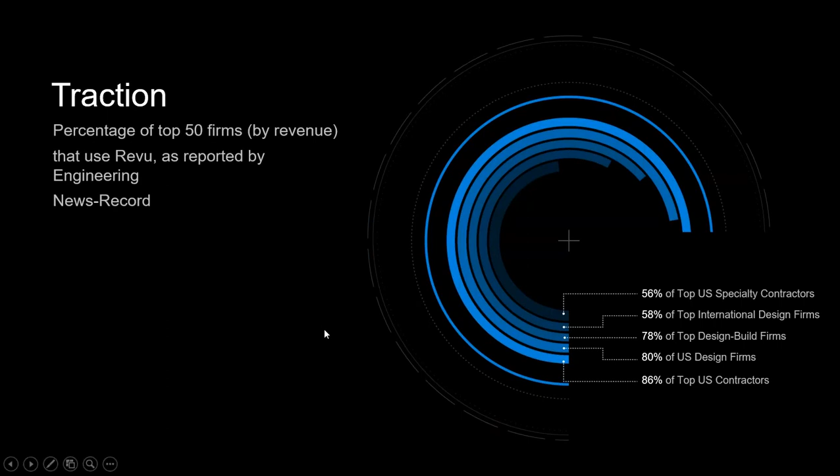And that's what we're going to highlight today, a few of those particular aspects that are new to 2016 and very useful throughout this technical world. So as I mentioned, we're going to go through a foundational explanation of what Bluebeam Revu is and what it can do, broken down into 5 parts. We'll start with the interface, then move into the markups, placing information on the page. The tool chest, which is reusing that information later on, not only with yourself but the rest of your team. And then we'll get into the markups list, which is harnessing the data that you're placing on the page.

You may not even be aware that you're doing so, but there's a lot of metadata behind all the markups that you're placing on the page—authors, dates, and times—and really harnessing that and applying it to workflow can be very, very useful. We'll show a highlight of how to do that.

And then finally, we'll touch on Bluebeam Studio. That is the cloud collaboration platform built into every seat of Revu, and what it's capable of doing—not only hosting your documents, but allowing you to collaborate with your team in a live environment.

So again, this is kind of the intro. I'm going to show off the list of what's included in the newest revision of 2016, but then we're going to go ahead and demo the basics first before hopping back into it. So without further ado, here is the big reveal of the new features within 2016. Not going to go too deep into these right now, but these are some very, very valuable tools that I'm looking forward to showing off.

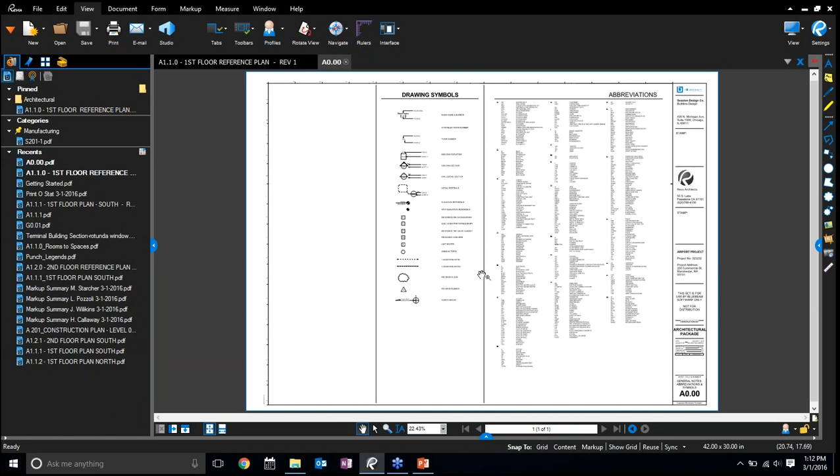Now you'll see, obviously, I don't have any other documents other than this original one, so I'm going to go ahead and open some others. Maybe I want to open this A0.00, which happens to be my schedules and abbreviations, different items that I can cross-reference against my A1.1.0.

Now, in this particular case, I may want to open an A1.2, for example, and this one has a few markups on it, and this will all open, and I can kind of cross-reference these.

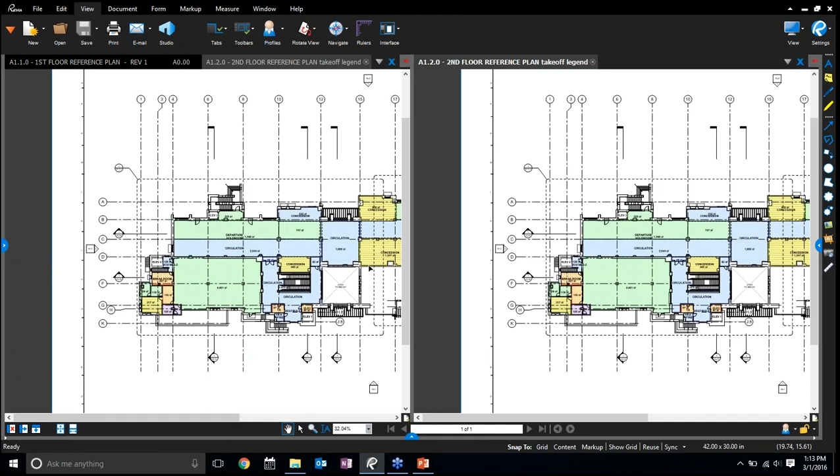But in this particular example, I may want to cross-reference my second floor plan versus my first floor plan. So to do that, I can come down here in the bottom left and select my split vertical. With this, it will basically put the same document on both halves, but with a click of a button, I can now have these documents side by side to cross-reference them.

I can zoom in and navigate each one of these individually, and you'll notice, as I go about doing so, I can try and align the column lines if I'd like, or I can come down to my sync button and be able to navigate both of these at the exact same time.

Now, as I zoom or pan, it's going to allow me to work with each one of these documents at the same time. Now, these are not actually lined up exactly on X and Y coordinates. As you'll see, they're kind of shifted a little bit, which is totally fine.

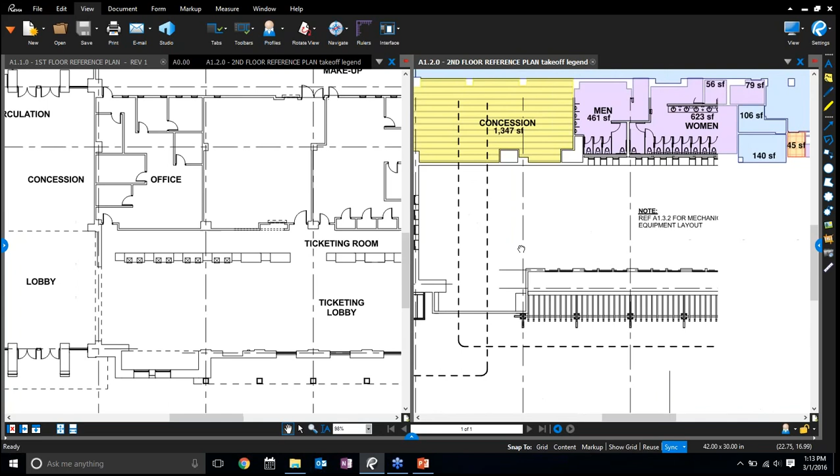But if I were to, for example, need to cross-reference if there's bathrooms one on top of the other, or pipe chases, to be able to confirm if there's any plumbing issues or anything like that, I could be able to do that in this case.

Now you'll see here, I have a men's and women's bathroom on the second floor above what appears to be just an open blank area, and so there may need to be some extra consideration for where I need to run these pipes to and from that particular bathroom. Just one particular example, but again, it allows me to work with multiple documents at the same time.

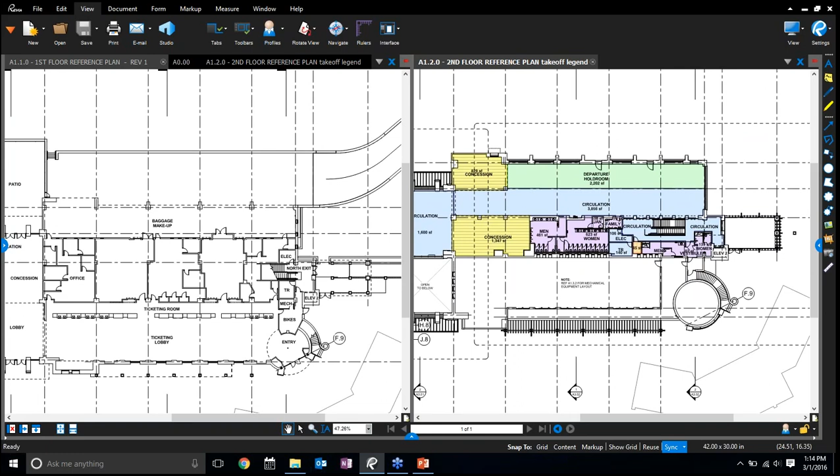Now, I could split my screen up to 16 times if I'd like, but I'm going to go ahead and unsplit and clean this up and work with one document at a time in this case.

So the next thing I want to go ahead and highlight is the ability, of course, to mark this document up.

So in this case, I'm going to come up to my markup option, and then over to all these icons that you're seeing here. Now, if you remember, these were all grayed out originally, and that was due to the fact that I didn't have a document open. Also, if I have a locked document, both in read-only mode, or it's got some security on it, for example, these would again be grayed out because you're not able to mark up a locked document. But in this case, it's unlocked, so let's go ahead and start working with it.

So, for example, I'm just going to go ahead and place a text box, and it works just like any other text box. And I'm just going to go ahead and place that information. Now, as I place that particular text box, you'll notice that I don't know what door I'm talking about. No one else does either.

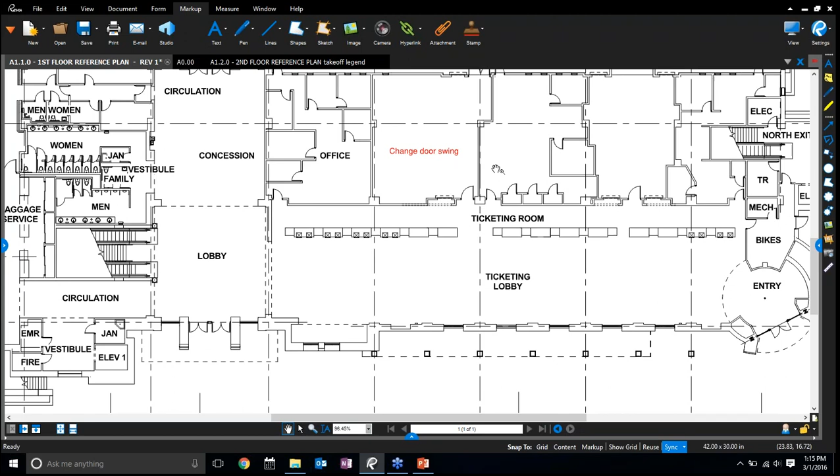So what I'm going to go ahead and do is actually place an arrow. So place an arrow, text box, voila, I know exactly what door I'm talking about. But that was kind of a bit of a process.

So instead, from now on, I'm going to start using my callout. So I can go ahead and call out an area and say, move ticketing 2 foot south. So I can now move my ticketing desk 2 foot south, but I don't know what desks I'm talking about. It could be all of them. It could be a singular one. And so now I need to be able to call out a particular location within the drawing.

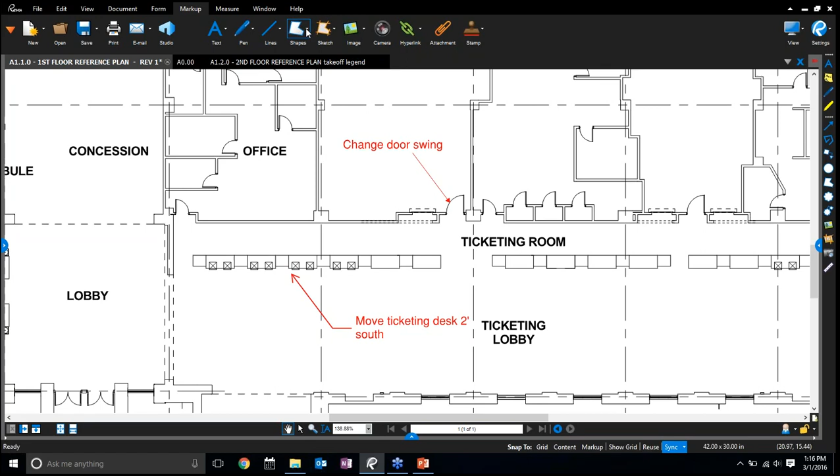Now, this is all nothing new. People have been doing this for decades with red pens and yellow highlighters trying to signify locations on the drawing. And kind of the default solution that the AEC world at least has come up with is the cloud. So from this location, I'm able to signify that I want all clouds, or I just want a particular sum, or whatever it may be. Again, this is still 2 independent markups.

So instead, what I'm going to go ahead and do is actually combine all 3 of those individual markups, the text box, the arrow, and the cloud, into one clean little markup, and place this here.

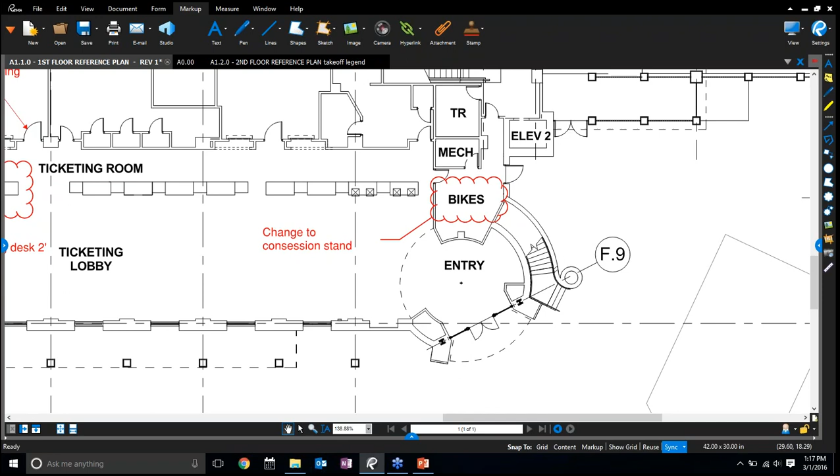So now I can go ahead and change that bike room to a concession stand because that's at the top of that particular stair, for example. That may be where I want my Starbucks to be, and that would be very easy to communicate.

Now, in this case, I may also want to be able to add visual context, for example. I may not know what concession stand I'm talking about. So I have a few options. One, I can come over to my images function, or I can right-click and come over to capture.

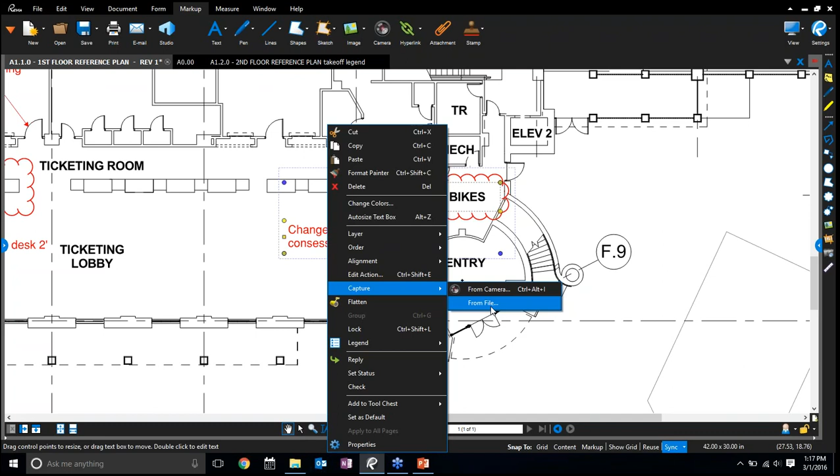From here, I can actually attach a picture from my webcam or from my computer. Now, I have some files saved on my computer, and my webcam's facing my face, and you probably all don't want to see that. So instead, I'm going to come back to my files that I have on my computer and find those images. Now, I don't have a picture of a concession stand, for example, but as I zoom through, we're just going to add a picture of a sliding door.

Now, you'll see that little camera lens there. That is basically signifying that there is a capture or a picture attached to that markup. As I click on it, it's going to basically populate or fill the screen. What's great about that is not only is it going to carry with wherever I put that markup, but it's not taking up screen real estate with an image when I don't need it.

Now, anyone with Revu would be able to access this by, again, clicking that camera lens, whether they're on the Windows desktop version or the iPad, and vice versa. So a fantastic way to be able to share contextual information, because a picture is worth 1,000 words.

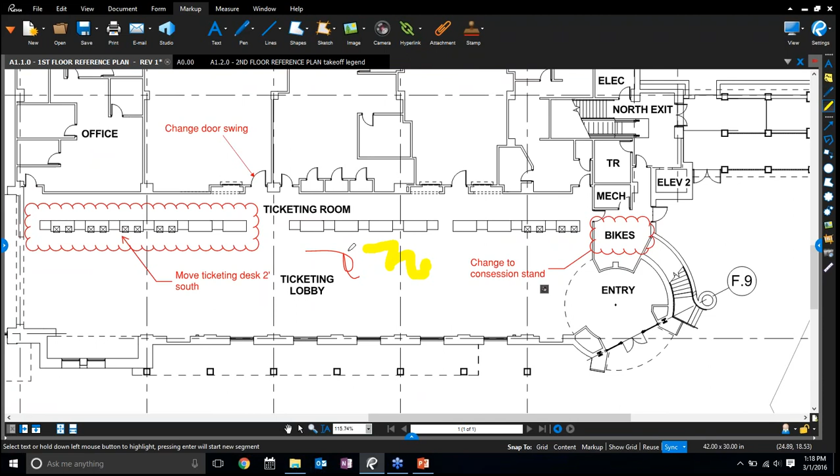All right, so now that I've placed a few markups, I do want to mention some others that we have. We have pens. If you're working with a touch interface, we have highlighters, which are fantastic. Not only can I do freeform highlighting, but it actually recognizes text as well. So it's a very useful way to be able to signify areas within the drawing. We have lines and arrows, all sorts of other things.

Dimension is a very neat tool because as I snap to content here, I can actually signify what area of the drawing that I want and ask, in this case, what is this dimension? Not a whole lot of typing or information that needs to be placed. Just 2 clicks, a little bit of text, and I can now signify that. Maybe I'm nice enough to put a cloud around it, make it obvious for my architect that I need that particular dimension.

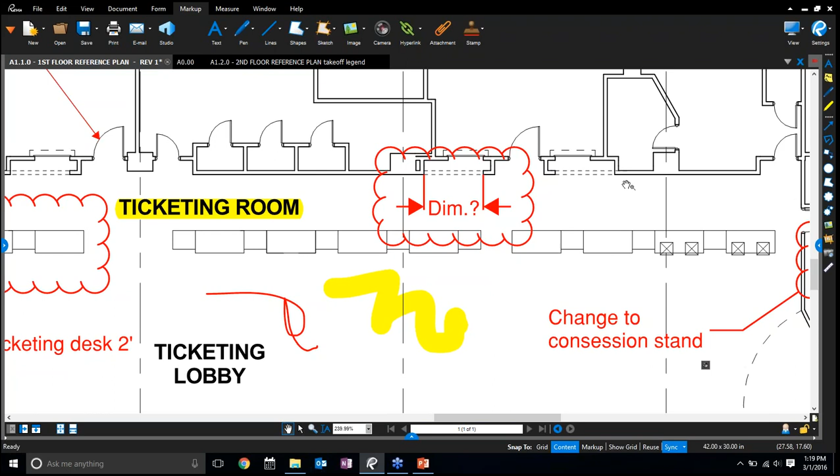Okay, so enough talking, let's go ahead and customize these guys. I'm going to customize all of them at once, and I did that just by multi-selecting. From here, I can go ahead and right-click and open the Properties panel. Now, right-click is a very powerful tool within Revu, because if you don't know what you're capable of doing, wherever your cursor is, you can always right-click and it will pop open. In this case, I'm going to go ahead and give everything a subject, maybe a subject of architectural.

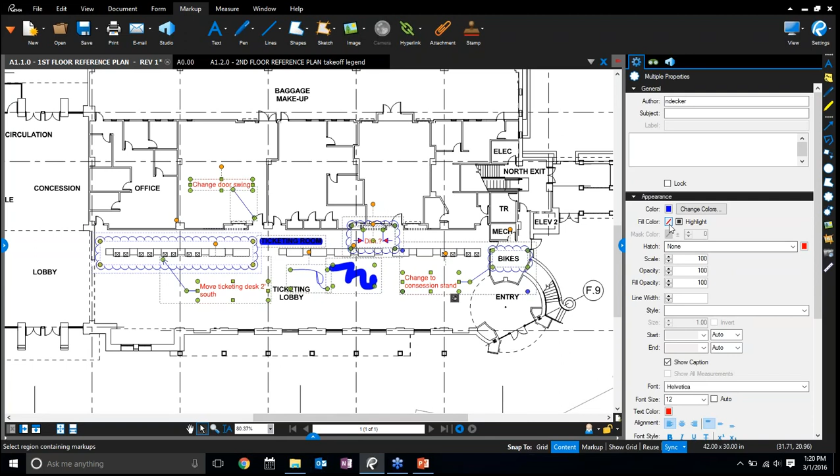And we'll go ahead and change the color schemes as well. Now, you'll notice with the subject, it's not actually going to change any of the physical properties, but it will come into play here in the markups list at the bottom, and we'll get to that in a moment. So I'm going to give everything a fill as well, kind of make it my own. Now, everything that I give a fill automatically becomes opaque. So I'm going to go ahead and change it to highlight, as you'll see, and that will allow the content and the other markups to pop through.

I can also change the fill opacity if I'd like. And as I move down the line, I can go ahead and change the text colors and maybe text size if I'd like, make it a little bit smaller, but let's bold it out a little bit, and be able to make all that customization that I'd like in this particular case.

Now, in this case, I'm going to go ahead and actually assign a custom tag. This is something that's specific to this particular drawing, and I'm going to assign myself as the responsible party in this case. Oops, go ahead and make that a cloud again. All right, so now I've gone ahead and customized all of these.

So let's start working with them. Now I could go ahead and select it, then right-click and copy, right-click and paste, and then try to resize it. But that's really kind of a difficult way to go about things. Plus, as soon as I change documents, I'm going to have to redo that exact same process, and then no one else on my team can use it.

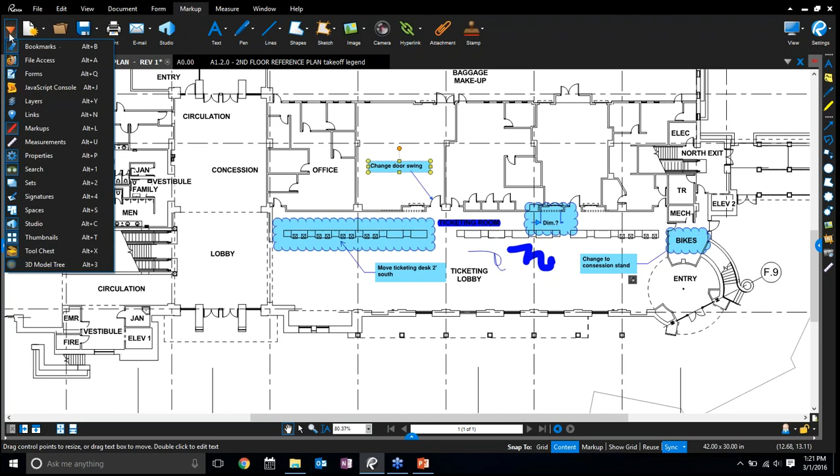So instead, what I can go ahead and do is come over to my tab, Access and Tool Chest. Within the tool chest, as you'll see, there's a number of different tool sets that are already available. I can create my own if I'd like, but you'll notice here under Recent Tools, I have a running list of what I've done so far. So if I want an exact copy of that change door swing, I can place that markup here, place an arrow wherever I'd like, and be able to signify that without really having to go back through that process.

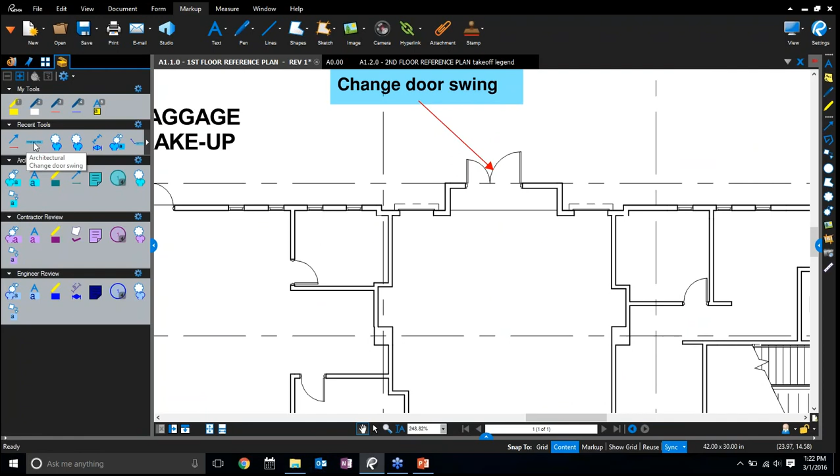Now, again, this is an exact copy of what I just did, which is just a click and drag. But if I just want to use the properties themselves, say for example this Cloud Plus is actually in properties mode. I can go ahead, signify the particular column that I need and say 'need column detail.' There, I'm able to signify that information, and it stole, or borrowed if you will, the exact same properties as the other Cloud Plus that I placed on the page. So really useful way to kind of color code all that information.

Now if I come over to properties, it's interesting—that should say architectural as opposed to Cloud Plus. But again, all of those properties that I customized should carry over.

Now you'll notice that I have a few other tool sets that I haven't touched yet. One is My Tools, which basically creates keyboard hotkeys, and then architect, contractor, and engineering. Now these are specific to the particular profile that I'm in. So if I were to change profiles, for example, we'll hop to construction, and come into the tool chest, you'll notice that they're a little bit different. They're more construction specific, in this case sequencing tools.

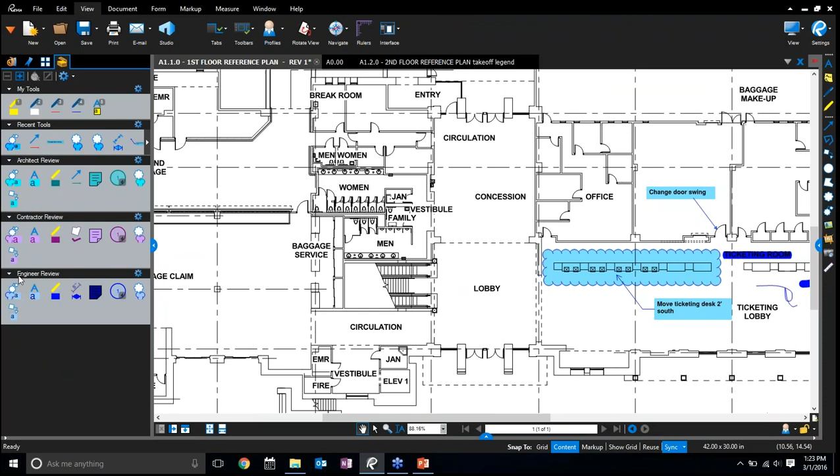But I'm going to go back to design review. It will bring me back to the view that I had as far as the tool sets and things, and I can start utilizing from here.

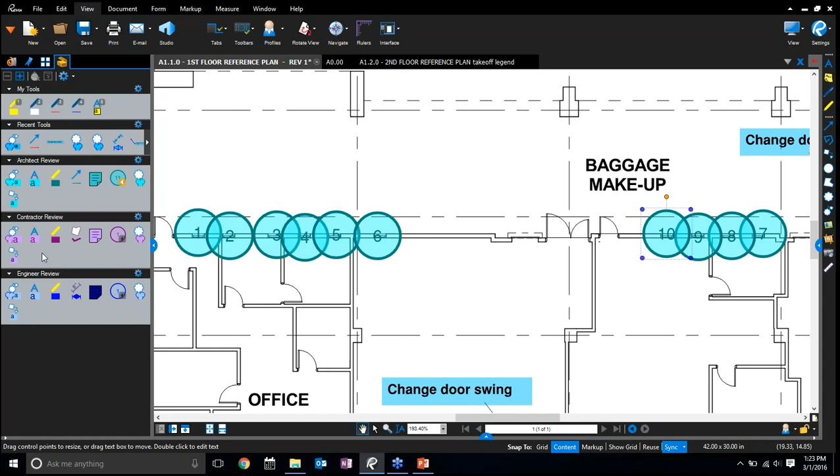Now, if I wanted to sequence, for example, the installation of windows here, I can start counting out which windows I want in which order. And then I want to skip back and start going this way. I'm now able to signify the sequence there in that particular location. Now, the architect may not do this, but the contractor very well could. They may try to signify to their field employees what order they want things constructed, and this is a very simple way to do that.

All right, so I can also create my own if I'd like. In this case, I'm not going to go into that because I want to conserve some time to show off all the other stuff, but know that it's available. We have some resources online to be able to show that.

All right, so the next aspect I'm going to show is the markups list. So as I center myself kind of over this mess of information I've placed on the page, you'll see that there's a lot of information down here at the bottom as well. So if I want to see where any one of these items are, I can go ahead and click it, and it's going to jump me to that spot of the page.

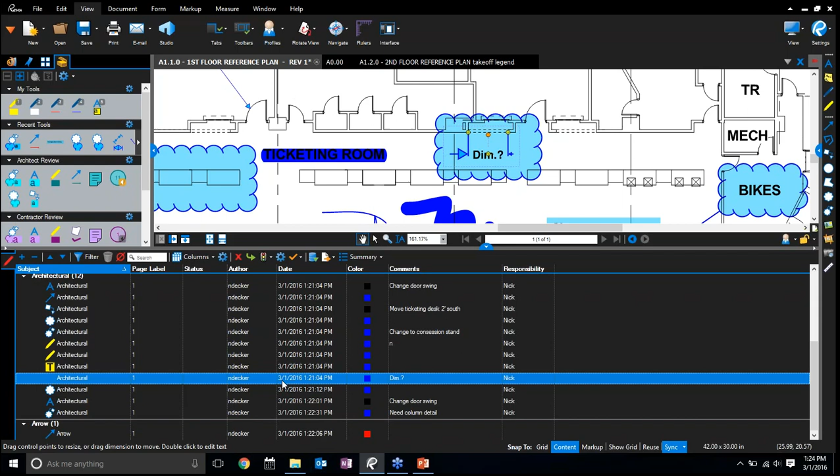In that dimension, you'll notice it's capturing not only the text that I placed, but also signifying what type of tool I had, the subject I assigned to it, and who is assigned the responsibility, as well as any date and time. I can do that with any one of these other items. If I need to find where these items are located on the page, I just click on any one of these, and it will navigate for me.

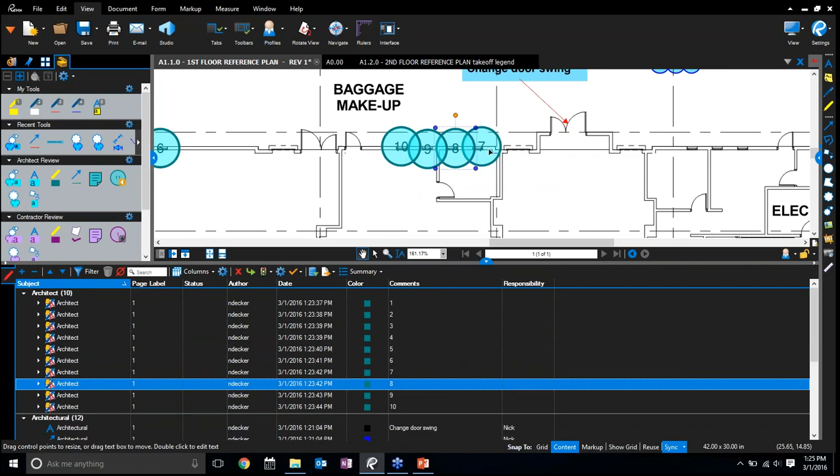Same with these sequences here. You'll notice it's capturing the text within the page and jumping and highlighting to whichever one I've selected within the markups list. Same thing goes vice versa - if I change which one I'm selecting, you'll notice the bottom of the page is changing as well.

Now, what is this useful for? The answer is really kind of harnessing your data. Again, I allude to that, and it's very, very powerful.

Now, in this case, I've got an option to assign responsibilities. I'm going to go ahead and assign several of these in the properties panel to John, who's on the line with me. Then I'm also going to assign this last one, as I come to the properties panel, to Meredith, who also happens to be on the line with me.

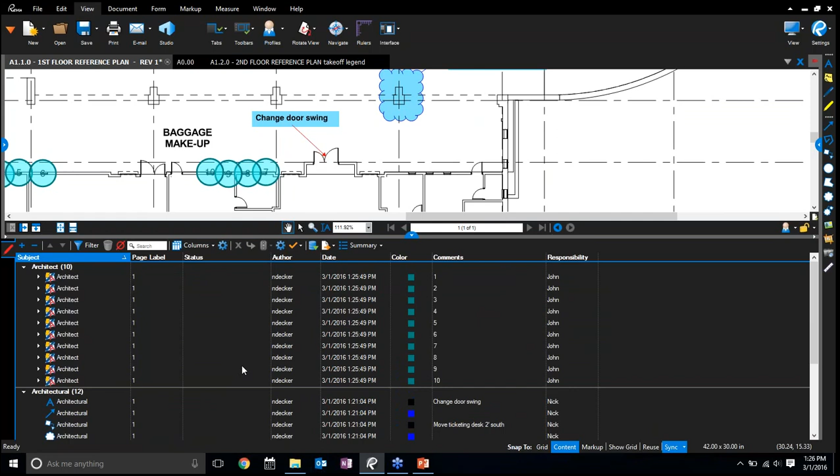Now, I've assigned this out, but I may also need to work simultaneously, or be able to tell them not only what this item is, but maybe the status or the information I need to convey. So in that case, I come over to my status column, and I can go ahead and accept or reject any one of these items. This can all be customized to fit your particular workflow, but notice it's capturing the status itself, plus the date, time, and author that this information was assigned.

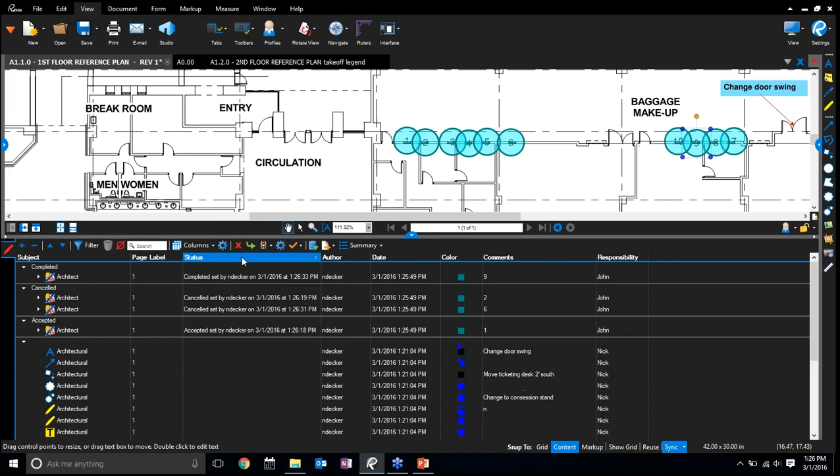I can now go ahead and sort, for example, by status, and these will automatically or dynamically sort into their specific categories, or I can go back and sort by subject. I can also filter to anything I'd like. In this case, I just want to work with the architectural items. I can go ahead, filter to architectural, and anything that is not architectural.

In this case, these - the architect markups were now grayed out and no longer in the markups list themselves.

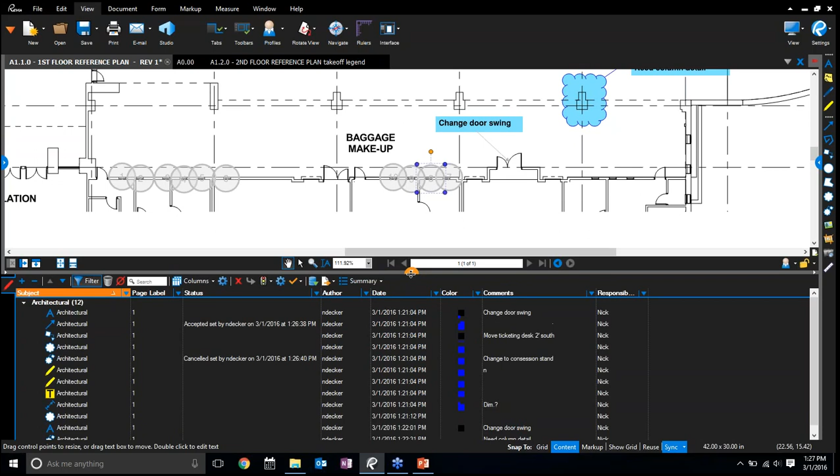So from this point, I have them all assigned to me. I'm going to go ahead and reassign some of these to John. Again, I can change my mind to whatever I'd like. Make that assignment - maybe make these last few to Meredith.

And now recategorize or sort dependent on who's the responsible party. Now, it's still filtered to architectural, but John and Meredith are now broken out. I can see how many line items I've assigned to each.

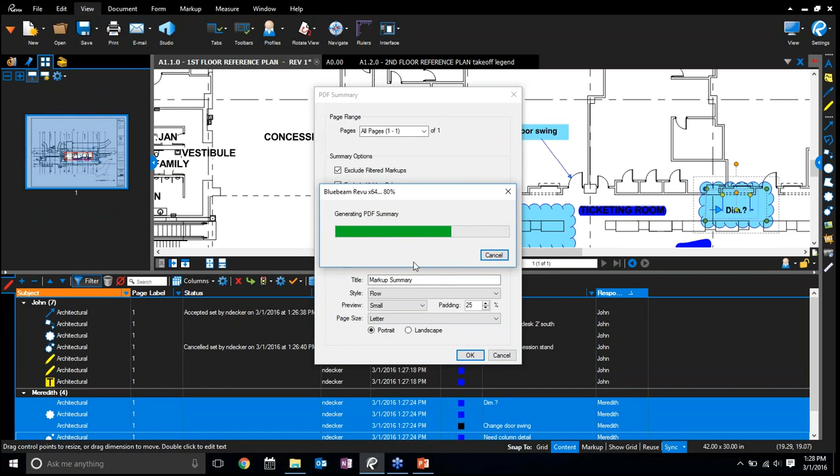From this point, I'm going to go ahead and run a report. But before I do, I'll show off that this is a one-page document, as you'll see. So what I'm going to do is run a summary, and I'll pick the PDF summary, but I can also send this information to, for example, Excel to start harnessing this data. I'm going to append this to the current PDF, click OK, and you now see it's generating a PDF for me, and it's actually attaching it to the back of this drawing, since I said append.

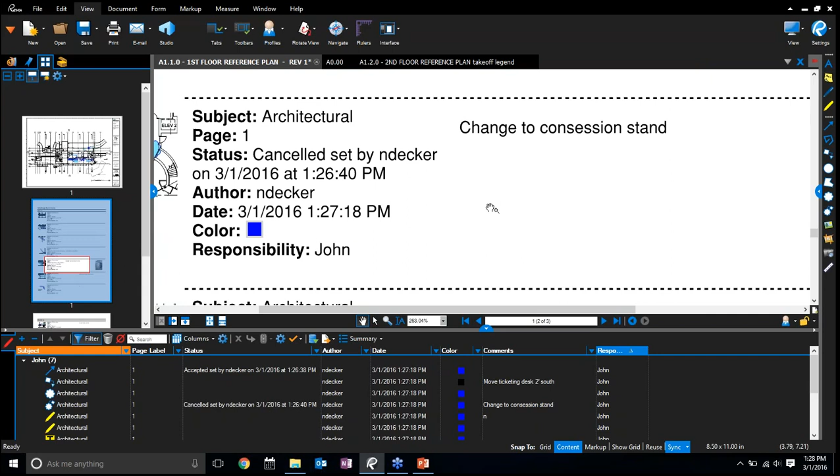Now as I zoom in, you'll see that anything included in the markups list down here is also being included in the markup summary, this 8.5 by 11 document. And since I captured or attached that picture to that particular line item, it's also giving me a thumbnail of that, and a thumbnail of where this is located.

Now I may not know where the bike room is or where this particular comment is, but you'll notice my cursor changes to a hand with an H. That means it's hyperlinked, so if I click on it, it's going to jump me to that spot of the page. It's a very useful way to navigate and distribute this out. I could, for example, just click the email button from here and send this off to Meredith directly if I'd like.

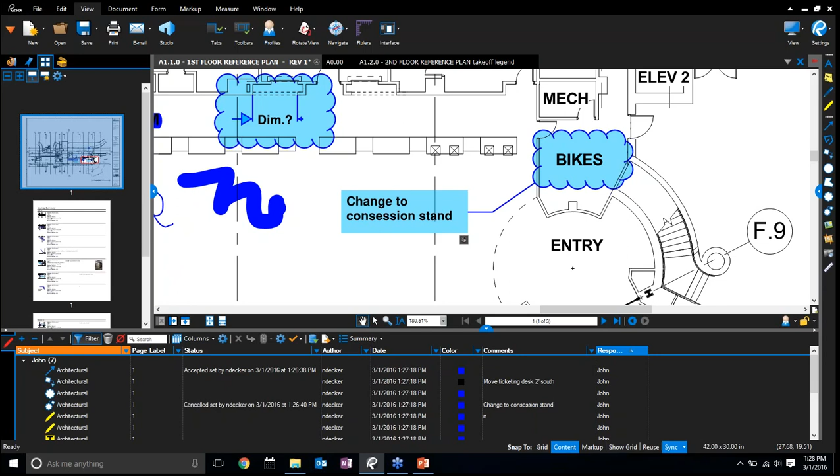Now I'm not going to do that. What I am going to do is actually transition one last time within the fundamentals or foundational aspect into Studio. I don't have a lot of time to spend on this, but I do want to mention Studio is broken into two halves: Studio Sessions and Studio Projects.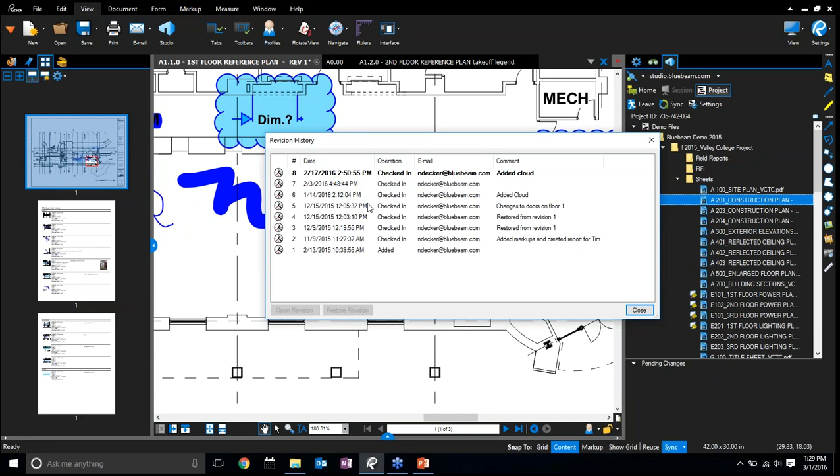Projects works like a document management system. I can put a folder structure of information here, able to host all sorts of different files, for example Revit files and Navis files, as well as things as simple as Word documents. So I can host my specifications published to PDF, as well as the Word documents associated or printed from those, as well as any revisions included. In this case there's only 2 revisions to this document, but if you have files with several different revisions, in this case 8, I can see not only who made them, but when they made these changes and what the commentary was when they were checked in. Very useful information, and I can go ahead and open or restore any of those older revisions if I'd like.

The other half of Studio, as I mentioned, is Studio Sessions, a live environment where I'm able to invite individual people, and they can come in and mark up with me. I'm not going to dive into this too much, but I do want to show the ability to have the rest of your team in this live environment and talk with you. They're all offline currently, but I can see what document anyone else is viewing, change those documents, view any of those, and then run back to the records list to see where these items are taking place.

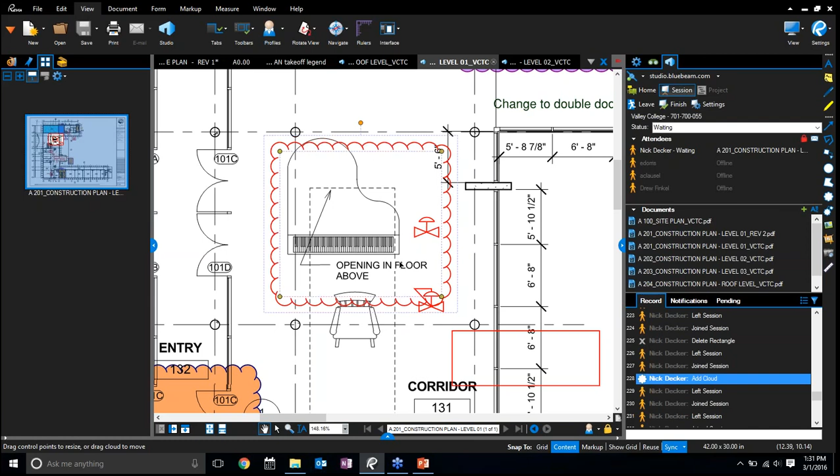For example, there was an alert to Amy Klossel about this particular item, but I don't know where this is without any context, so I'm going to click on it. It's going to take me to that particular spot of the page. So a very useful way to navigate around your drawings without having to explain or pull up all that information ahead of time. I can run reports from here and have a running records list, or meeting minutes if you will, of all the information taking place within this.

Okay, so that all being said, let's hop back into these new features. You'll see the feature list here. We're going to start with batch markup summary. I showed the individual version of a markup summary, but the batch version is just as powerful, if not more so, in its ability to harness all of that data across individual documents. So I don't have to do this one at a time and run reports. I can do this all at once, have a consistent structured reporting system, and then send that out to the pertinent parties very easily.

The next one would be legends. It essentially works like a legend of a map, where you're able to communicate what's the content of the page without having to dive into, for example, the markups list and all that data, if you're working with people outside of the Bluebeam ecosystem as well. Very, very useful tool, and we'll show a couple workflows that pertain to that.

We'll also highlight a bit of the Revit enhancements that were included in the Revit plugin of Bluebeam Revu, included in CAD and Extreme. Very, very useful tool to be able to export model information out of Revit into the PDF file format to share with anyone. We'll touch on a little bit of the document enhancement and document management enhancements as well.

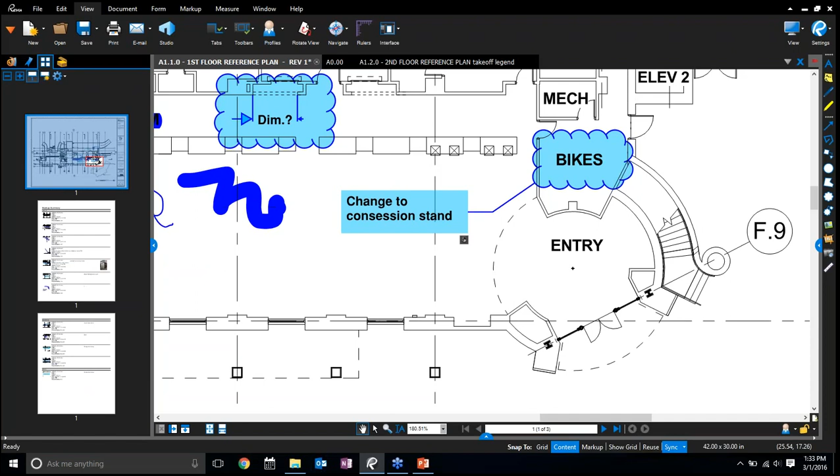Thank you. All right, so with that, let's talk about batch markup summary. I'm going to come back over to review, clean up a little bit, not save any of these documents, and actually come up. I don't even have to have documents open. But I'm going to come up to File and Batch.

This batch menu has been continuing to grow over the years. We started with just a few items, to be able to, for example, place stamps and maybe flatten markups, things like that. But again, as customer feedback came in, they really wanted to start harnessing the data on the page, and that's really where batch markup summary comes into play.

So I'm going to select the summary option. It's going to bring up this context menu to be able to add files to this particular script, if you will. And so in this case, I'm going to go ahead and add a whole bunch of files. As you'll see here, as I populate them, there's about a dozen files, all with individual markups that I need to be able to understand.

We'll come back to the load batch function in a moment, but essentially it would allow me to give whichever files I want to be able to pull in on a particular basis, or basically run reports repeatedly, and then that will allow me to do that process over and over again.

Now as I click Next, it's going to basically prompt me to pull in whichever columns I would like. Now these are the columns out of the markups list that you saw, but I can kind of pick and choose what I want included. So I'm going to go ahead and deselect all for the moment and just pull in certain aspects.

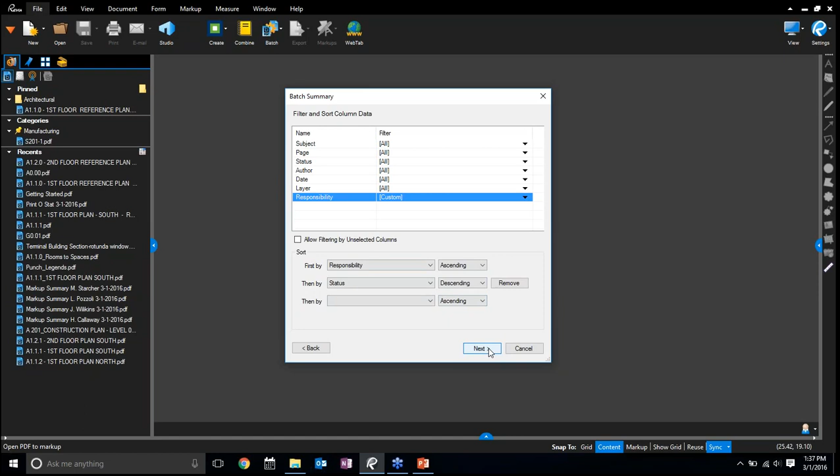As I click Next, I'm brought to my final item of the settings window, which is the ability to run the report. Now, you'll notice I can run this report, as I saw in the summary markups list again at the bottom, into a number of different formats, including, for example, CSV, which allows me to work with it in Excel. Now, I'm going to run a PDF report. I think it's pretty powerful, and it kind of works within this ecosystem.

I can pick where I want to distribute these, and I can go ahead and change this name. For example, I'm just going to put report as opposed to summary.

I'm going to create multiple reports per responsibility and add a date to the end of this. I want to create all 5 of those reports per person, or 1 report per individual, and date timestamp this, if you will, so they know when it was printed out, giving them whatever I designate, 24 hours or 48 hours or a week or a month, whatever it may be, to take care of these particular items.

I'm also going to go ahead and import a template. From here, I can go ahead. I have a company letterhead that I want to import. Go ahead and click Open, and from here I can go ahead and assign where I want the report data to land. I don't want it to cover up my letterhead here at the top or the bottom. As I click OK, it's going to go ahead and basically populate and squeeze the data into the window that I provided. I can customize all sorts of other aesthetics within the report as well.

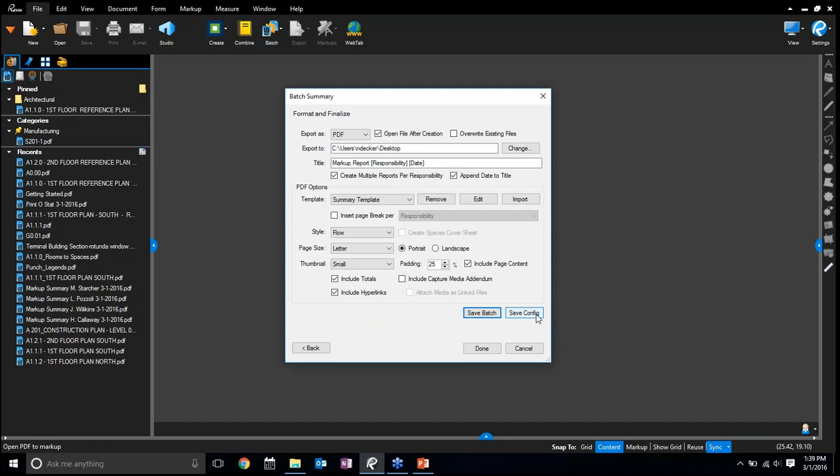I have the option to save batch and save config, which would allow me to utilize all these settings for later use. Now, as I click Done, it's going to go ahead and create 5 reports for me.

It's running it. Basically, it found 27 individual markups that meet the criteria that I gave it. And you'll notice that these 5 reports now open across the top.

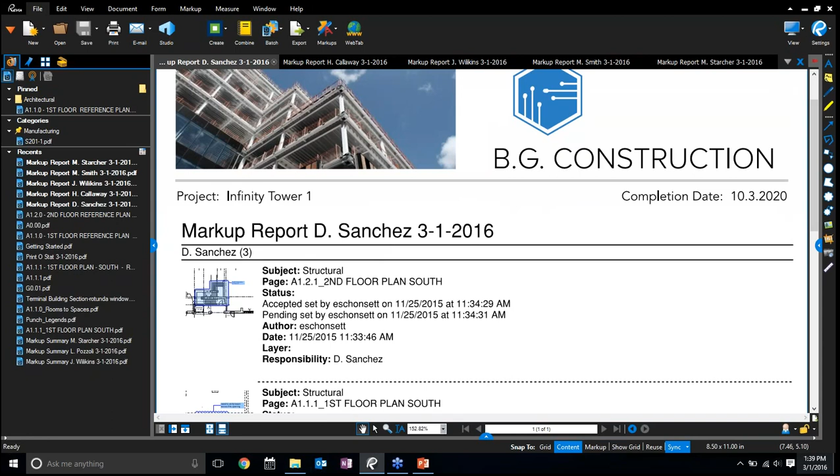Now I'm going to work on D. Sanchez first, and you'll see that not only did it bring in D. Sanchez's name, but the 3-1-2016, which is today's date. Happy March 1st, everyone. Now, you'll see that I can see all of that metadata and information just like I did in the markups list at the bottom. But this was all dependent on the columns that I chose in the column chooser.

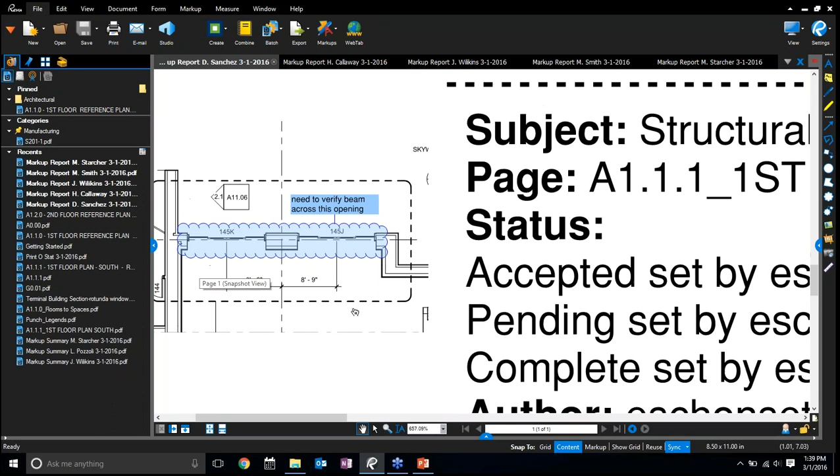It's also giving me a thumbnail view of that information. So if I wanted to zoom in and see, hey, I need to verify this opening, whatever it may be, I could always go ahead and navigate back to A1.1.1 and see if I can find the right revision. But instead, it's hyperlinked.

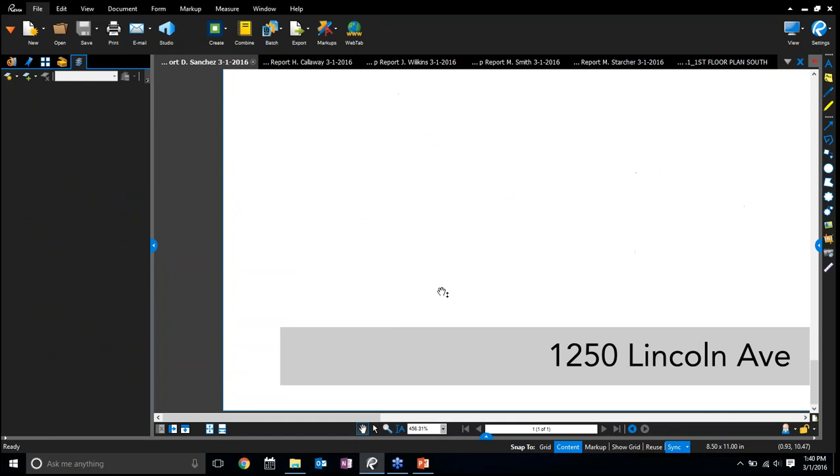I go ahead and click that item, and it's actually going to jump me to that location of the page as well. So I can hop back, review the next item down the list, or up the list in this case. It's going to jump me to that particular spot on the page, which just so happens to be on this exact same drawing as well.

So very useful way. I could go ahead and shoot this off by email to D. Sanchez.

If all of these files, drawings, and whatever it may be, are hosted in a network drive or on Studio or some other web-based document management system with unique URLs and relevant paths, I would be able to hand this off to them, and those hyperlinks would still work. It's a very useful tool, without having to reinvent the wheel and try and point them to a particular location. Increases that navigation and productivity.

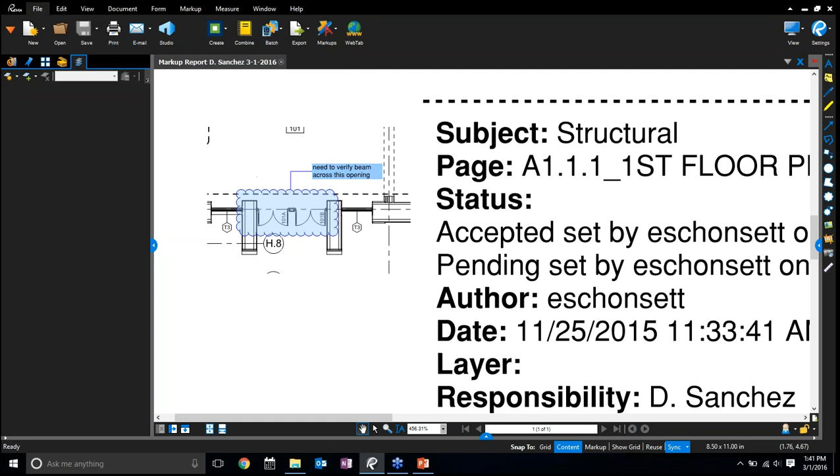Okay, so that is batch markup summary. I'm going to go ahead and close all of these up and hop back into the slides and talk about this next item, which is legends.

I alluded to legends earlier as well because it functions very similar to a legends map, or map legends, excuse me. And it's a very neat feature because it works dynamically. It's always updating itself, but it functions as other markups would.

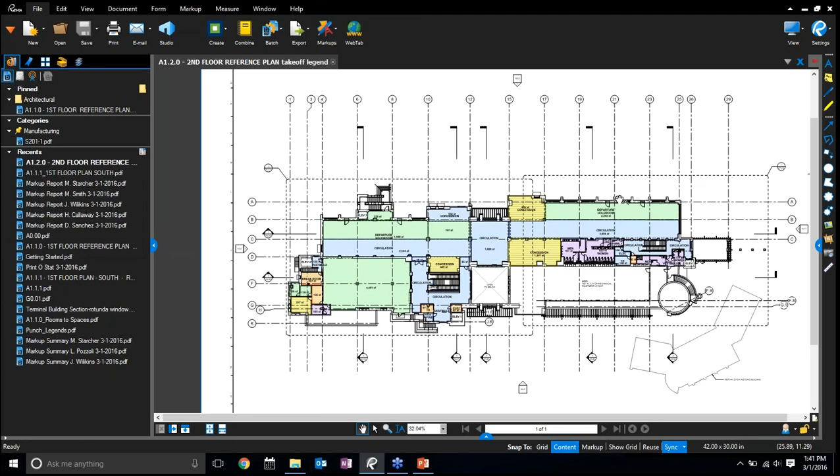So I'm going to go ahead and pop open my legends items here, and I'm going to start working in takeoff. So in this case, someone's been nice enough to already do a flooring takeoff for me.

As I pop open the bottom hand panel, you'll notice that there's several different markups. And these are all individual flooring takeoffs, and they're all different types. For example, subjects of carpet and concrete, hardwood, resilient flooring, you get the idea. Now, each one of these carpets, for example, is all subcategorized out to CP1, CP2, CP3, which all have a unit price as well.

So I need to be able to capture and understand all that information, but I don't have any roll-up quantities down here, and I really want the ability to share this with anyone, outside of the Bluebeam ecosystem if I'd like, and have it function and really translate all the information that I've taken the time to place on the page.

So to do that, let's go ahead and select all the markups on the page, as you're seeing. I'm going to right-click and add to legend. It's just that simple. I'm going to create a brand new legend.

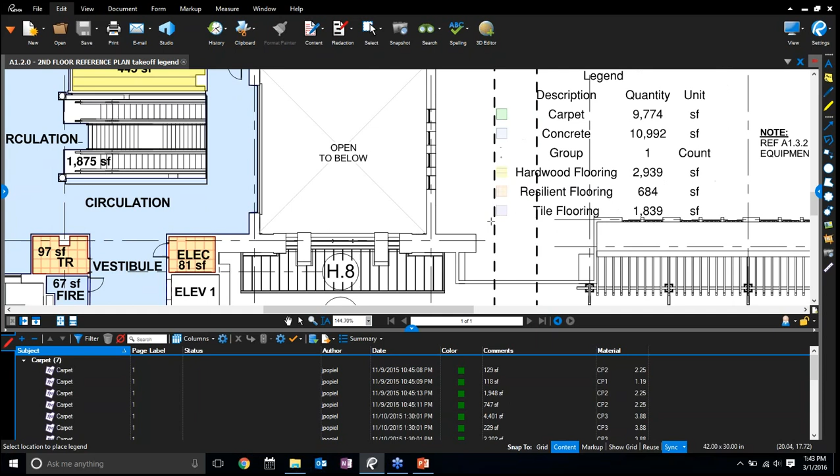You'll see that as I zoom in, I have this floating table attached to my cursor. If you're close enough to see, carpet has a certain quantity, in this case 9,700 square feet. Concrete's got 10,000 square feet, and it's breaking this all down for me, giving me the units as well as any sort of appearance that you're seeing here.

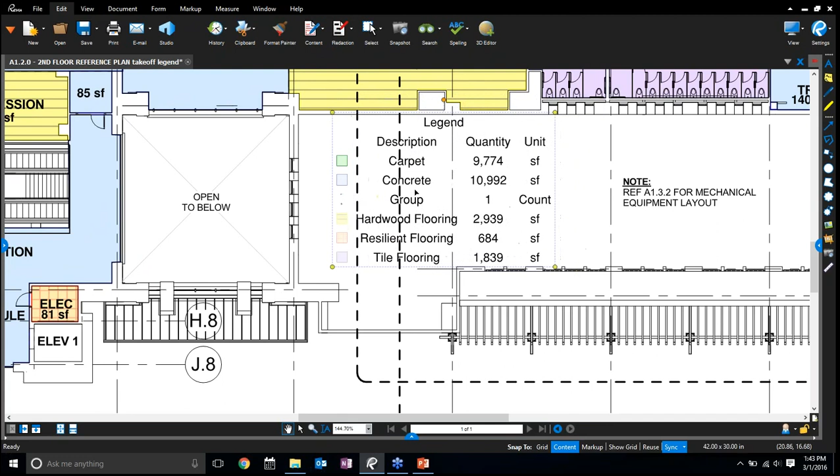In this particular case, it's a little tough to see because it's floating above some other markups and things, so I'm going to give it a bit of a background, a little contrast. Just like any other markup, I can right-click and change the properties of this. I'm going to change the title in this case, and this will dynamically update.

I'm also going to include the column of material, since each one of those materials, for example carpet and concrete, were subcategorized into CP1, CP2, CP3, and I want to be able to understand those subcategorized quantities as well. So as I add this material and click OK, you'll now notice that these are all broken out individually.

So it's basically categorizing based on the identity of each one of these line items and the columns that are included. For example, if I subcategorize based on statuses and things like that, which we'll show, it would be very useful as well. So the next aspect I'm going to do is the physical properties.

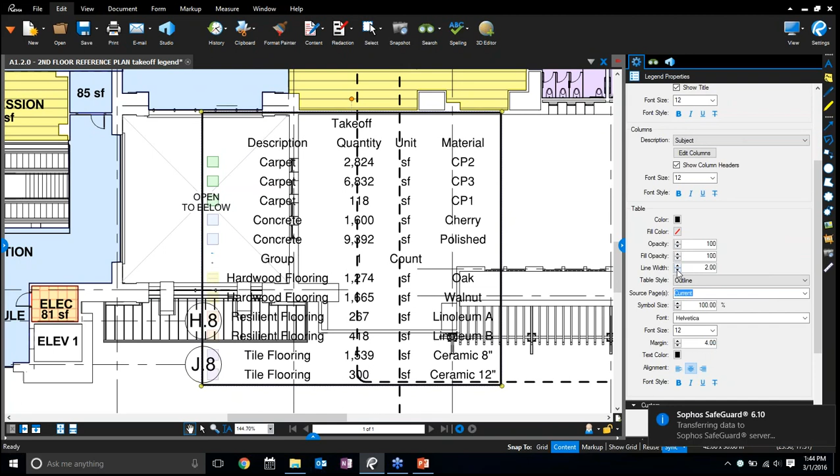In this case, I'm going to give some black outlines, a line width of 1, but we are going to give it a light gray fill, so I can see the contrast or the items a little better. I'm also going to change the table style to grid lines in this case. I want it to look like a table, be able to follow the lines up and down, whatever I'd like.

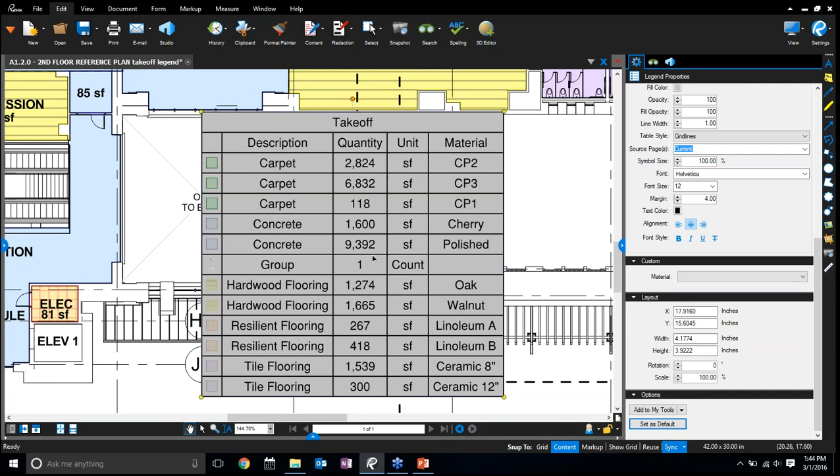The last item I'm going to do is set this as the default. Now, as I work and create other legends, I can go ahead and utilize all those properties that I've taken the time to create.

Now I want to show off the ability to work with this dynamically. Each one of these markups, in this case 1,900 square feet, is being subtotaled into the carpet. So if this were to be removed, any sort of dynamic function is going to update this table. As I click delete, you'll notice that CP2 went from 2,800 to, in this case, 876. So an easy way to communicate that information very easily.

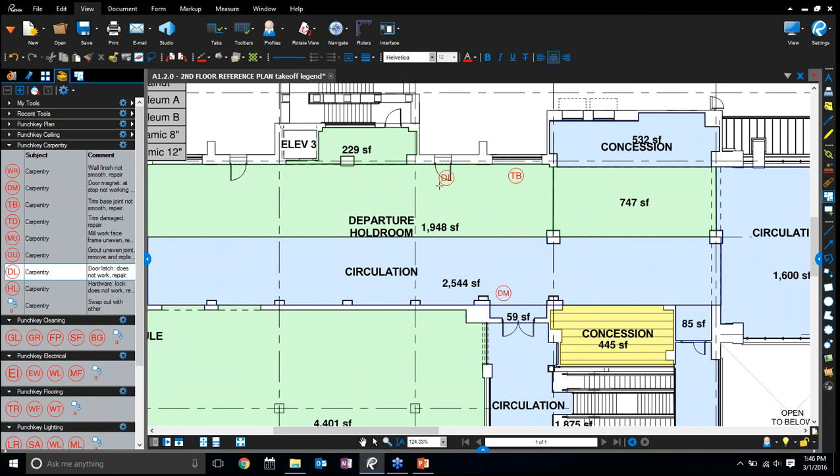Now, it doesn't stop just at takeoffs. I'm going to change my profile to punch, and start working in a punch tool set. Let's go ahead and do some carpentry punching. So there's door magnets here that I'm having issues with, maybe some trim base, door latching, whatever else it may be. And as I'm placing these items on the page...

It is basically counting down in the markups list, just like any other markup. Now, I haven't created a legend of this yet, but I will do that in a moment. I can actually do that directly from the tool set settings. If I select the blue gear wheel, I come over to Legends, and I can create a new one.

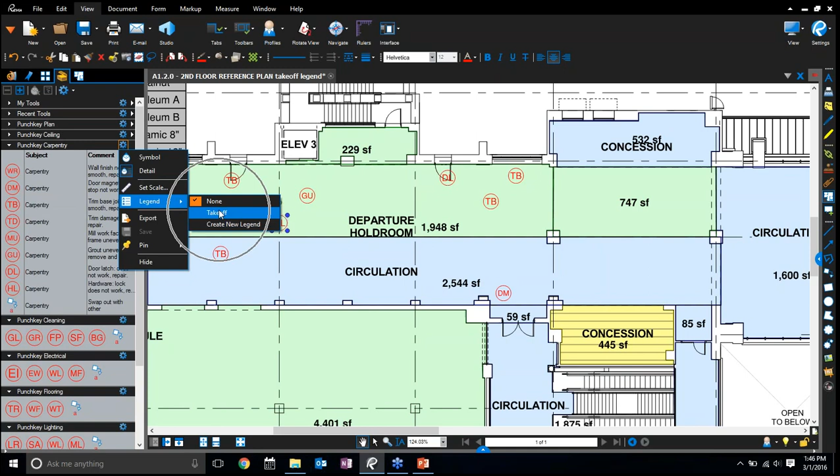I don't want to add it to the takeoff. I'm going to create a new one, and it actually inherits the properties of the tool set that I created as a default, but the title is captured based on the tool set that I provided.

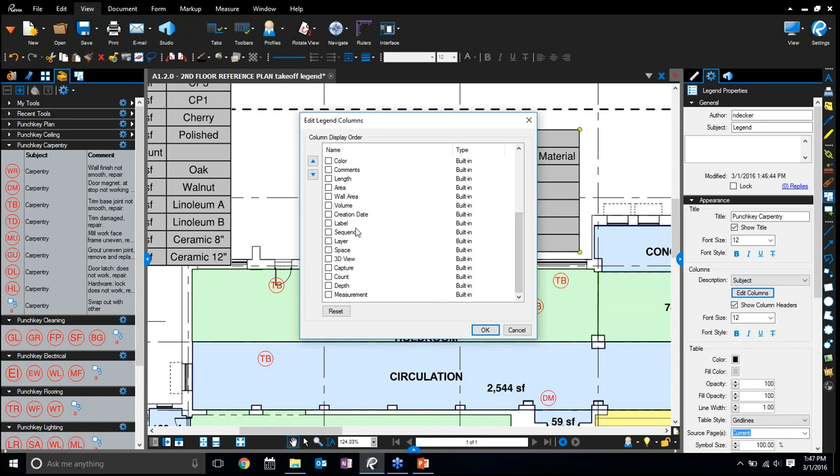Now, as I come over here, I want to change the properties to this. I'm going to edit the columns. Instead of material, for example, I'm going to include the status. Now, all of these right now don't have a status, so I'm going to start assigning statuses. I'm going to accept that, and you'll notice that that one carpentry item becomes accepted.

For example, I have 4 of those, and this will actually subcategorize out depending on the tools that I need. Now 1 of the 4 is canceled, where the other 3 are still counted out as individuals. So a very useful way to work with this information.

It's all dynamic, and I can share this out. Now, the dynamic aspect only works in Revu 2016 and newer, so this won't auto-update as it's worked on in other PDF software or previous versions of Revu.

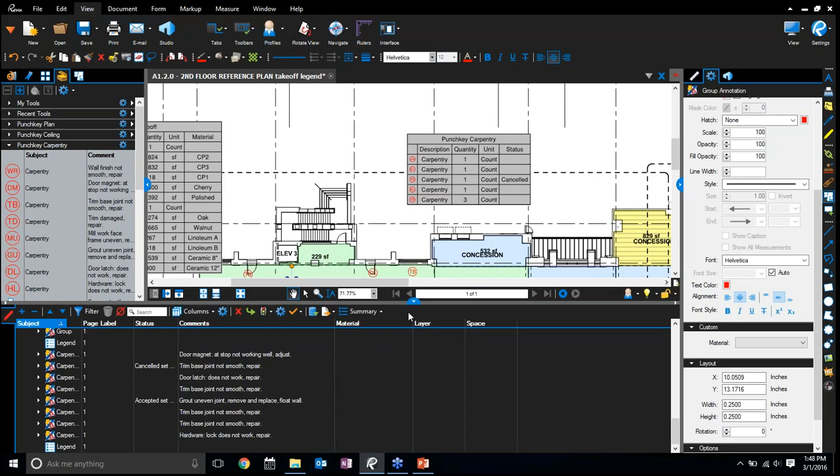You're not able to sort like you would with a dynamic markups list, where you can recategorize things. But there's a lot of functionality in coming up to edit columns and making individual drivers based on the column you'd like to select. I hope that answered that particular question.

And as I believe I answered, the legend works for symbols, including punch keys. Okay, so let's go ahead and talk about Revit.

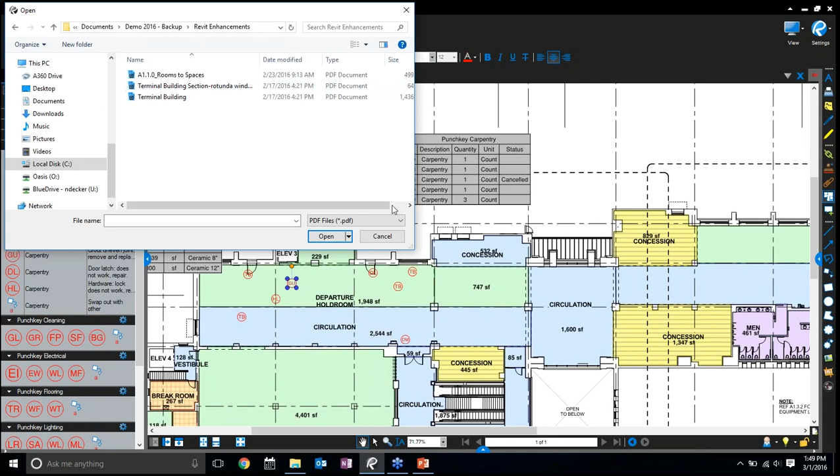Not everyone is going to be using Revit, which is totally fine. But for those of you that do, we have a Revit plugin. Let's go ahead and pop back out into this video here.

For those of you familiar with Revit, you're able to assign rooms essentially dependent on the walls you're creating. This is just a quick video showing it. The person running this comes up to the add-ins into the Bluebeam settings, and you'll see there's an option to export rooms into spaces.

For those familiar with spaces within Revu, it basically assigns categories or sub-regions within the PDF for tracking purposes. There's also an option to export rooms to area measurements, which will allow me to capture the areas automatically as markups within Revu as well.

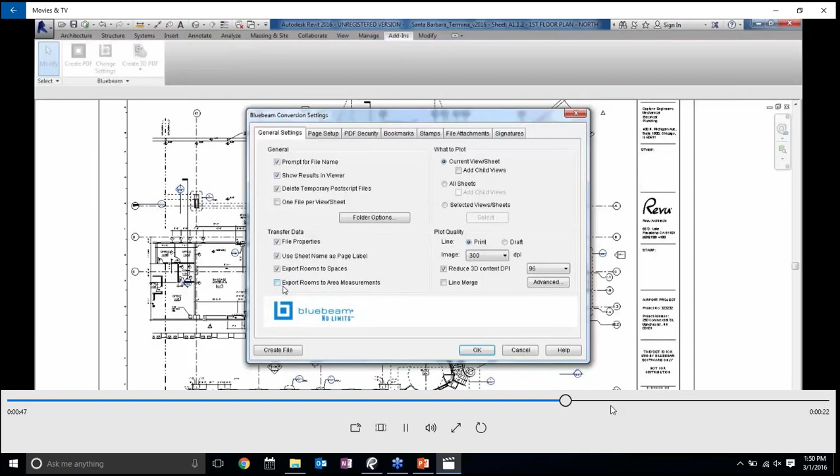From here, they would be able to create the file. As they click Create, it will populate into Revu, and you'll see on the left-hand panel all of the spaces that were created. So I have a quick example to show that translation process.

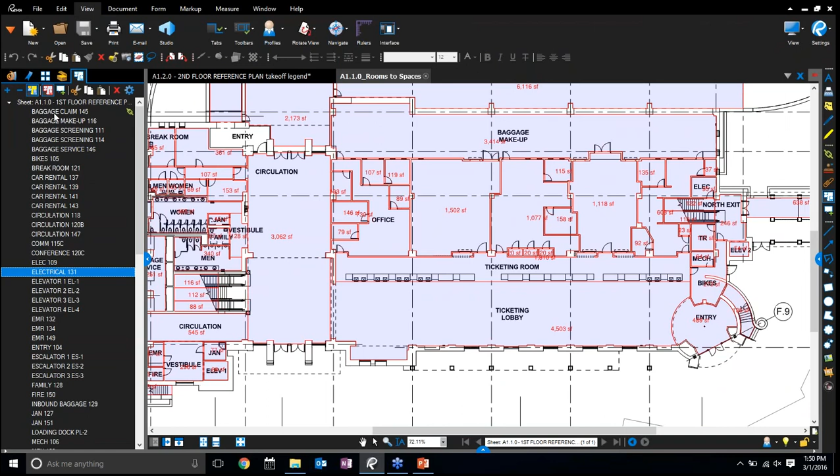As I pop open the spaces on the left-hand panel, each one of these spaces was created in Revit and was able to translate out into Revu, as you're seeing. You'll also notice each one of these quantities and the red lines are essentially area markups that were created automatically. Neat little feature here.

If I were to come up and select all, and I'm going to go ahead and add this to a legend—oops, I need to get out of the spaces dialog here. I can add this to a legend very easily, and you'll notice the area captured, excluding wall areas and columns and things like that, gives me 46,000 square feet assigned within this drawing.

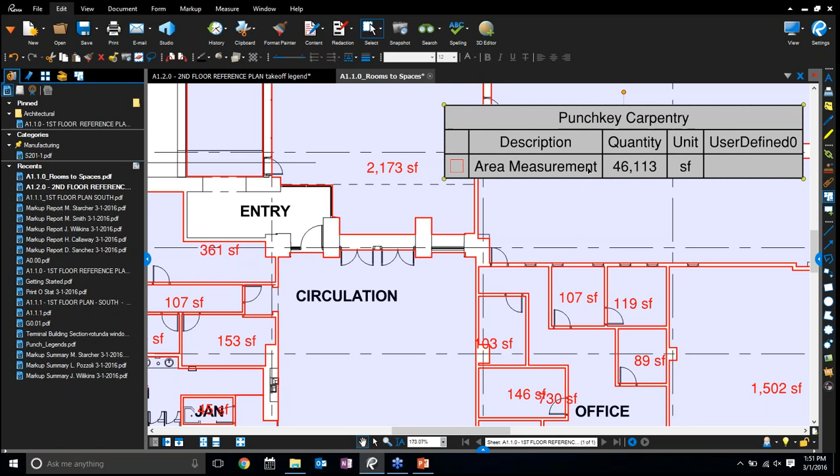A very easy way to be able to do that takeoff without actually having to think about it. So a neat little workflow there.

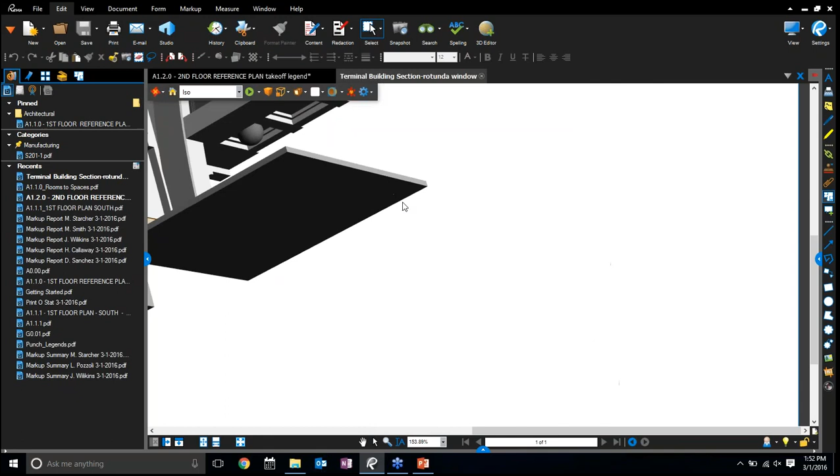There are additional enhancements within the Revit dialog as well, for example, the ability to export 3D PDFs with a little bit more high fidelity than was possible previously. You'll notice that roof colors, for example, are coming over, as well as wall colors and finishes, all in higher fidelity than was possible beforehand.

Okay, so with that, we're short on time, so I do want to really dive into tags. I'll just kind of mention the document management tools. There's a lot of enhancements to allow for simplification of revisions and batch functionality. We have some videos about that online.

Tags is a very neat feature that I want to dive into, and it's all housed within the sets functionality. For those of you familiar with sets, it's a very useful tool, and for those who don't use it yet, it basically functions as a hub to navigate all your individual drawing sets as if it were a combined drawing. So in this case, I'm going to come over to sets and modify or create a brand new set, and add individual files.

In this case, I'm going to go ahead and pop in just some original files. I'm just going to pop in my architectural files, and we'll go ahead and add some electrical files as well—a couple dozen files here, added very easily.

Before I go ahead and click OK and create, I'm going to come over to options. Sorting and categorizing were available in 2015, with some enhancements, but it really houses around this third tab, which is tags. You'll see here there are 3 already auto-populated options: sheet number, sheet name, and revision number. I'm going to add a couple more with these checkboxes that are AIA standards—discipline and sheet type—and then one final one, which is drawing date.

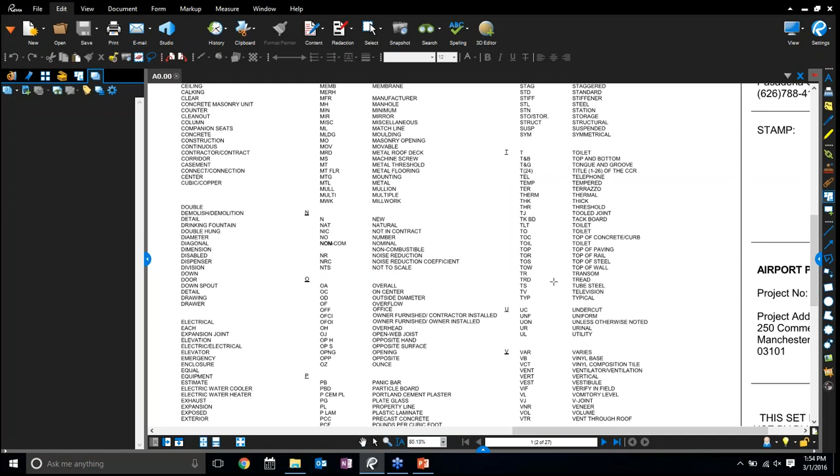As I click OK, I'm going to assign these, and it will ask me first for the sheet name. So I'll press Select and navigate to the sheet name. In this case, it's down here in the bottom right of the title block. I'm just going to click and drag a location on the drawing. I want to house the entire title because it's going to look at the X and Y coordinates on every single sheet that I'm trying to add, and capture all of that information from every sheet. It's going to add those tags.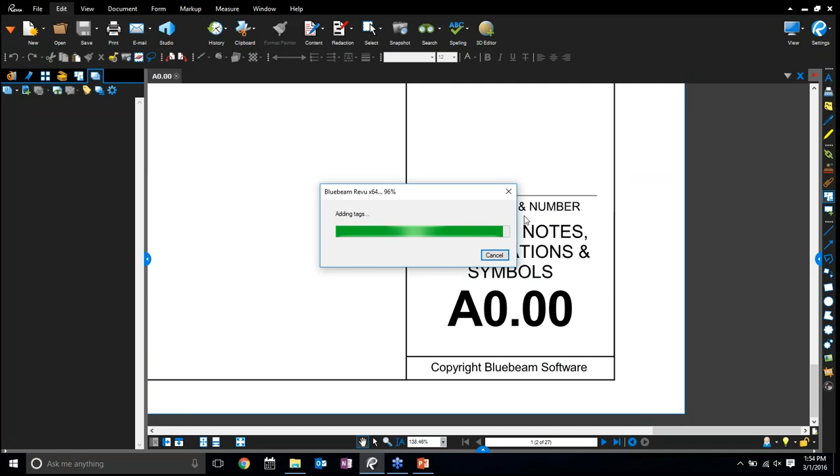It's going to install on the last one and ask me, what's the name of this file? Well, I don't know, because it happens to be a title sheet that doesn't actually have a name. It's going to say, I didn't find anything, try again. So in this case, I'm going to skip this document—it's not pertinent to add that one. But now, since I skipped it, it's going to move to the next tag, which is sheet number. Click OK, and do the exact same process around the sheet number. Click OK, and it will apply all of those tags as well.

It's going to ask for sheet number on this one. It's nice enough that I have one for this particular case, and as I click OK, it will assign that as well. The last particular tag I'm going to do under the AutoMark process is the drawing date.

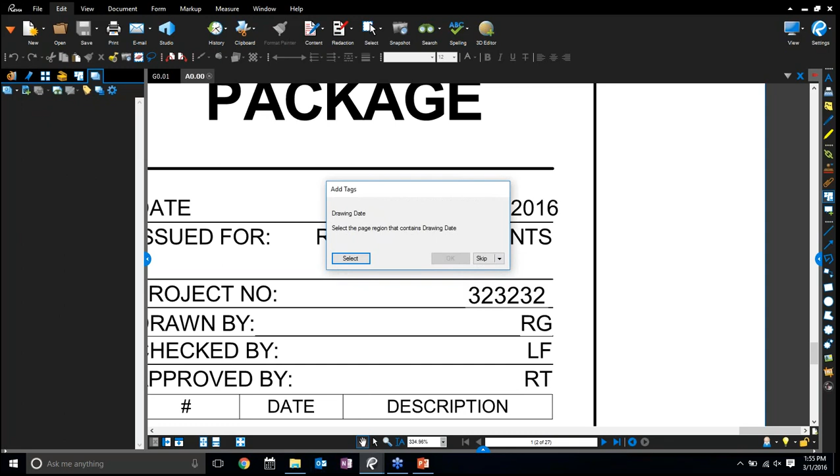Drawing date is very neat because not only does it look for the drawing date, it knows if you don't actually give it a drawing date. In this case, a project number isn't really a date, so I'm going to have to reselect and assign a true date—in this case, January 1st. It will auto-tag that for me. In this case, there's no drawing date for the title, so I'm going to skip that document again, and you'll see this table that's created is all the information that I just assigned.

So these 8 columns or so are all information being pulled from the document. For example, sheet names, sheet numbers, or revision numbers, as I mentioned, are auto-populated to 0 for these originals. Discipline and sheet type, again, are AIA standards being pulled from the sheet number—so the first letter is A, which corresponds to architectural, and the first number is 1, which corresponds to plans.

If I come down to E, it's electrical. E5, 5 happens to be details. You get the idea. Now, in this case, the G didn't have a date.

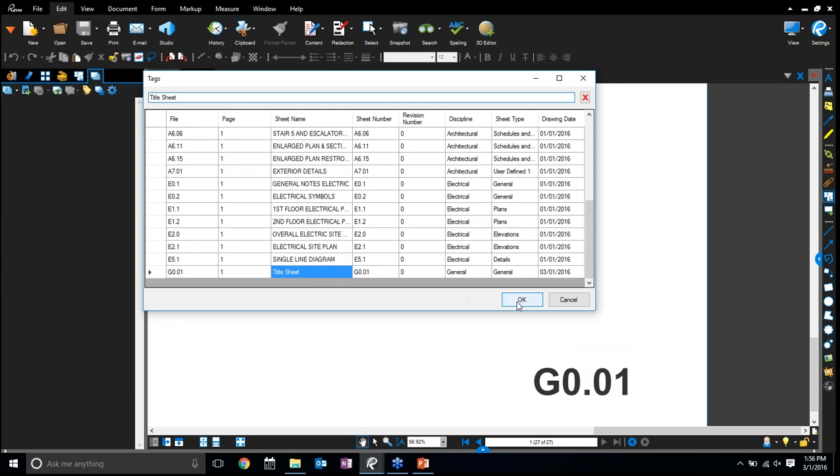So I'm going to go ahead and assign it one. I'm going to give it March 1st in this case, and I would be able to assign anything else within this text box by just typing within the window. As I click OK, it will finalize or basically assign at a document property level all the information that I'm applying. Now, if I come over to the document properties, you'll see this tags dialog here in the left-hand panel is all the information that I assigned to that particular item.

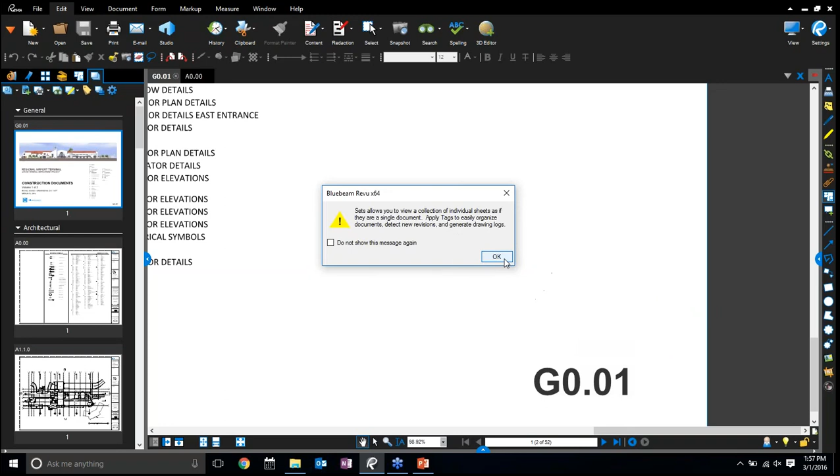So now I have my originals in, which is great. What I need to do now is go ahead and add my revisions. So I'm going to go over to modify my set. It gives me this prompt saying, hey, apply your tags. And I'm going to come back to my revision ones, add all of these files.

And what's great about this is the naming convention does not need to be consistent. In fact, it won't be consistent in a lot of cases between different revisions, and so it's not going to know, hey, is this actually the same file? Is it two different files? It really gets confusing. So that's what this tags process is really trying to take care of.

So as I click open, it basically assigns all those tags automatically for me. I didn't have to go through the process of assigning them because it's going to look in that same tag region that I assigned before. It's actually auto-populating the drawing dates as well, dependent on those locations.

So, for example, this is one that I hadn't assigned yet or hadn't seen. So it's going to go ahead and basically assign it as a Rev 0, but the drawing date is March 1st, whereas some of these items at the bottom are actually revisions, and those will still be that March 1st assignment date that you're seeing here.

It's, again, auto-populating all the rest of that dependent on the information that I gave it originally when I created the set the first time.

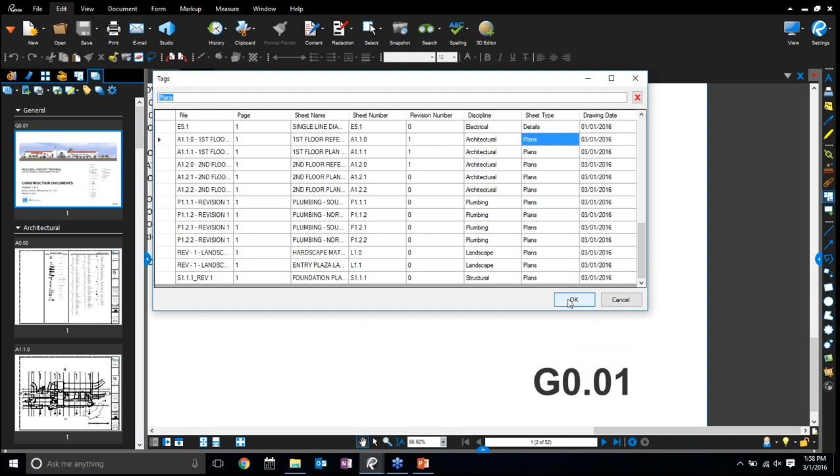And as I click OK, it's actually going to prompt me to show that it's stacking these documents one on top of the other. It's also asking if I want to pull over the markups that were included in Rev 0s, which there were markups included in Rev 0, and if I want to supersede all of those original items.

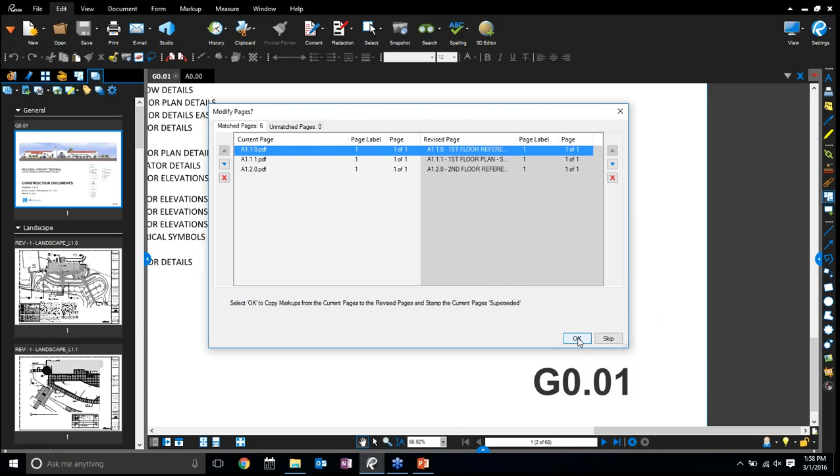Now I can go ahead and add or subtract or rearrange any of those if I'd like. But in this case, it looks pretty good because it's all dependent on the drawing number tag that I gave it. I click OK, and it's going to go ahead and replace those pages and kind of slip sheet them for me.

And as I come over to my architectural files, you'll see I have not only my clean new file, but my superseded old file as well. If I come down to this particular one, you'll notice that the markups themselves are being carried over, and those were carried over from the original as well as being populated on the original with that superseded stamp. Very, very useful, and I'm a huge fan of that particular process.

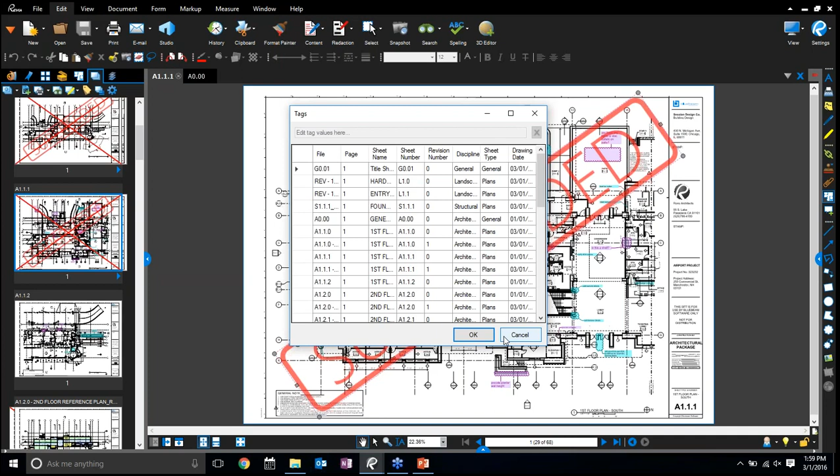Now, the last step of this would be able to harness all of that data in the table that you're seeing here into a drawing log, if you will. And so that's a useful document that people use to be able to track the documents that are included and released and the revisions that come out. And that's all capable under the Sets menu under Publish and Export Drawing Log.

From here, I can go ahead and assign whatever I'd like as far as the columns from that tags dialog, the tags table. And we'll go ahead and add a couple of these items you're seeing here. And maybe leave out, for example, the file path because I don't need it. Because guess what? This is going to be hyperlinked for me.

Fantastic. So I can go ahead and send this to Excel or PDF. I'm going to send it to PDF in this particular case, but Excel works just fine as well. I'm going to append the date because I want this to be dated by today's date. This is when I'm running the process. This is when these are latest and greatest. And if I ever save this set again, it would be able to automatically export.

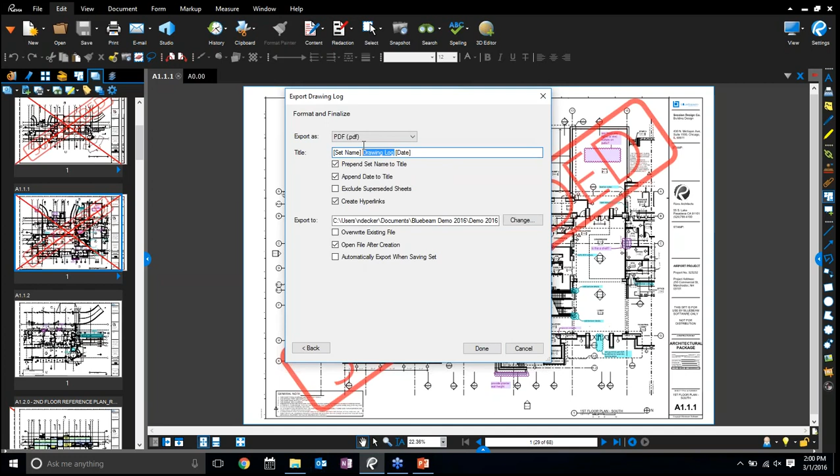The last thing I'm going to do is change this to Orange Blade as the title. Click Done, and you'll see I have this PDF document, which is a running table of all the information you're seeing here. In this case, I didn't bring over the sheet name, which is fine because I have the sheet number as well as all the information included with it.

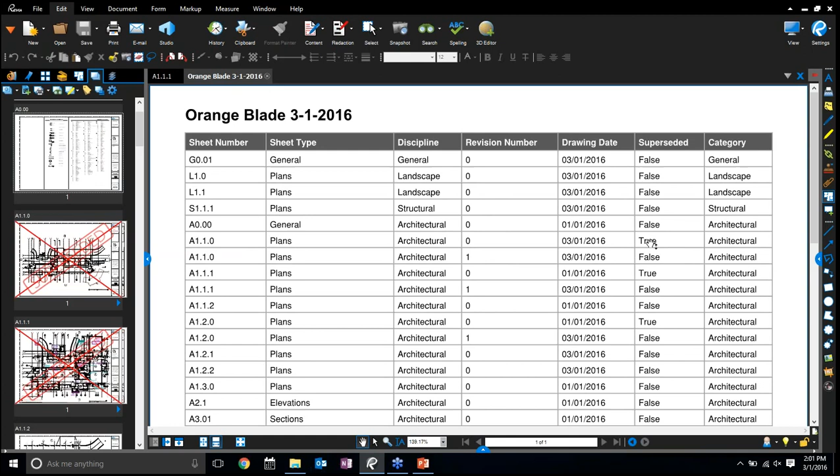If I need to know what something is, it's hyperlinked and will jump me to that particular document. You'll also notice anything with ones and zeros here - those are the revision numbers. Anything with a 1 is a false, and anything with a 0 that corresponds to a document with a 1 is a superseded true. If I click on that document, it should take me to a superseded stamp, but in this case it did not for some reason.

We are right up against the clock, but I want to talk a touch about the general enhancements. We've enhanced the ability to align all your different markups, giving a nice, clean format to all your documents. We added document management windows to the batch functionality to help match up revisions more easily, with more transparency. We also added XFA support - for those who work with documents that utilize XFA PDF forms, you're able to populate those directly from within Revu with higher fidelity. There's a slew of other items included in our release notes online.

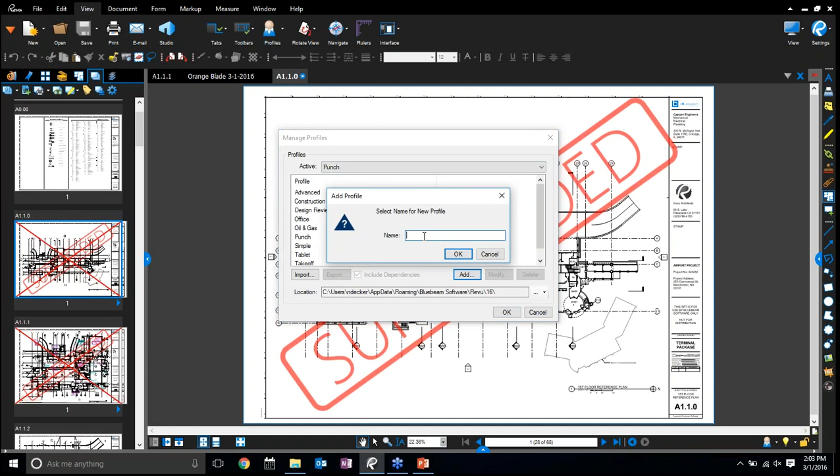There was a question about profiles - am I able to transfer my profile from my desktop to my laptop? The answer is yes. If I come over to Revu and up to my profile, in this case I'm going to create a new one. I've done a little customizing, so I'll create a new profile and call it Orange Blade. Click OK.

This may have all the properties I want. I want to be able to export it. If I come over to my blue guy with the bow tie, I can import or export. I select Orange Blade, select Export, and save it wherever I'd like - in this case on a network shared drive, or on my desktop, which would now have that Orange Blade profile. I could share that with the rest of my team by email, and they'd double-click the attachment to open it automatically in Revu.

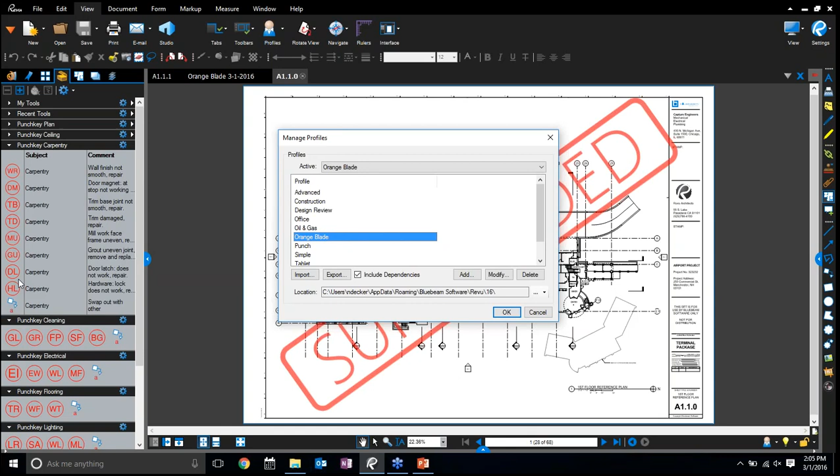There was a question about whether I can transfer my entire tool chest instead of just individual tool sets. The way to do that is to export the profile itself - the profile gives you the option to include dependencies, and part of that dependency process is the tool sets themselves. So if you export that, those should carry over as well. If they're not, you'd have to do them one at a time, or go into the settings option and multi-select from there, export those out, and attach a whole slew of those BTX files to an email to pull them over.